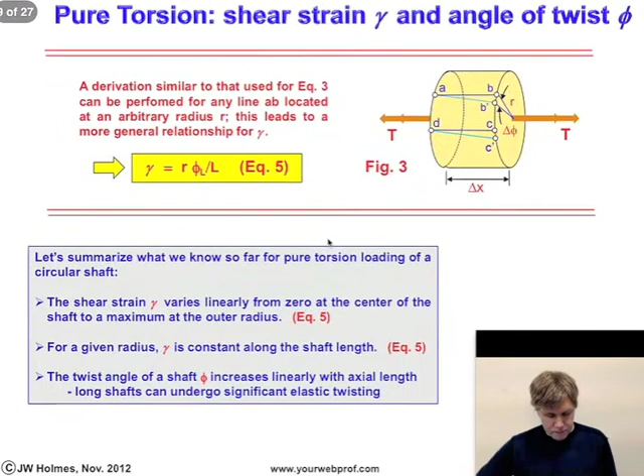All right, so let me skip through what we did in Part A. This was our ending point for Part A, and we're now in the general area of calculation of shear stress. So again, if you look at the rod, all we're doing is essentially taking a shaft, solid or tubular, and applying torques at the ends, and we'd like to know how the shear stress distribution changes as a function of radius of the shaft. Now, from Hooke's law, remembering back to your material science courses or your strength of materials course, the shear stress is related to shear strain by proportionality constant G, which is the shear modulus. So we just apply Hooke's law, and that's equation 6 that I show here.

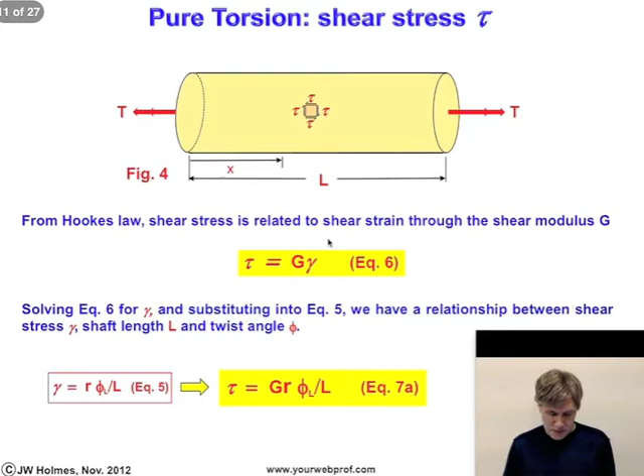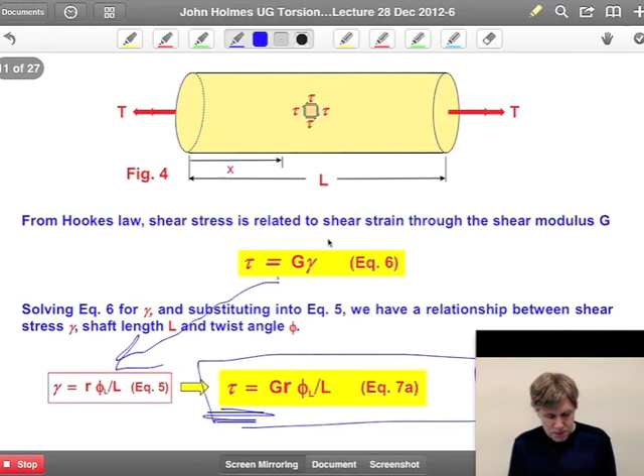If we now take equation 6 and substitute it back into equation 5, so essentially we've got equation 5 from the previous lecture, and we solve now for shear stress after substituting in, we end up with equation 7a, which gives us the shear stress distribution in the shaft as a function of r. So again, that's if I were to cut the shaft in half and look at the face of the shaft. As expected, because shear strain varies from 0 at the center of the shaft to a maximum at the outer surface, the shear stress had better also vary in the same way because they're related simply by this proportionality constant.

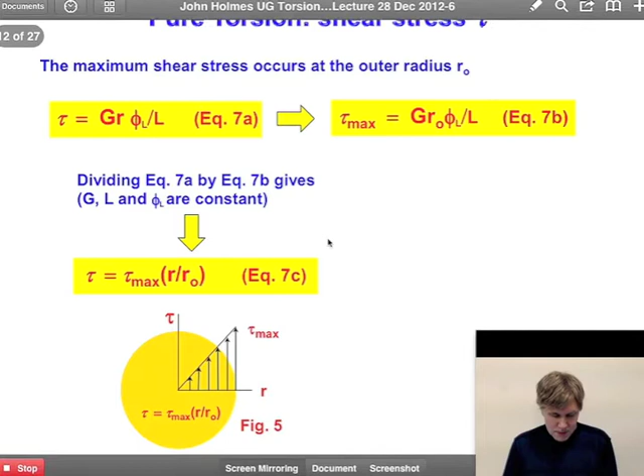Now we'll make use of this expression. Let's first use this to derive a maybe more convenient expression, and then we're actually going to use this expression to determine the shear stress distribution relationship to torque. Tau max naturally occurs at the outer radius. That's equation 7b here. If we now divide equation 7a by 7b, and noting that G, L, and phi L are constants, then we end up with the relationship that we expected between shear stress and radius. I plotted that here in figure 5, where I show essentially a cross section that we've removed from the shaft, and we can better illustrate the linear distribution in shear stress in the shaft.

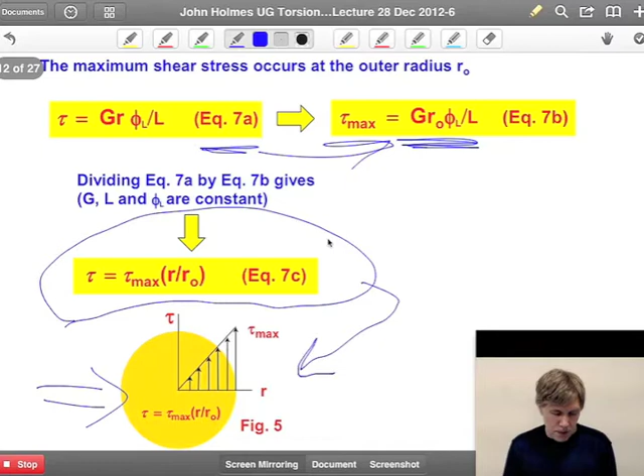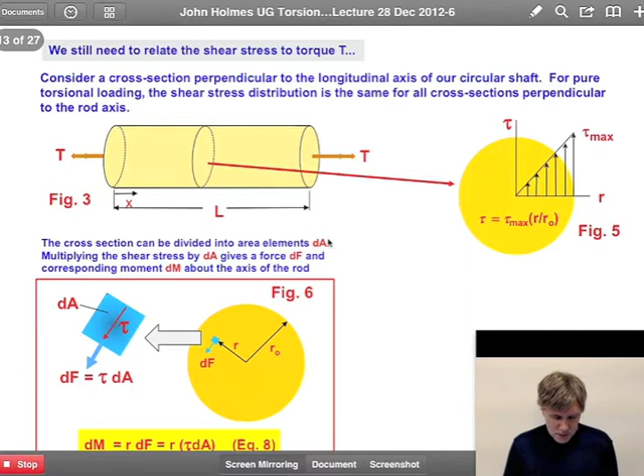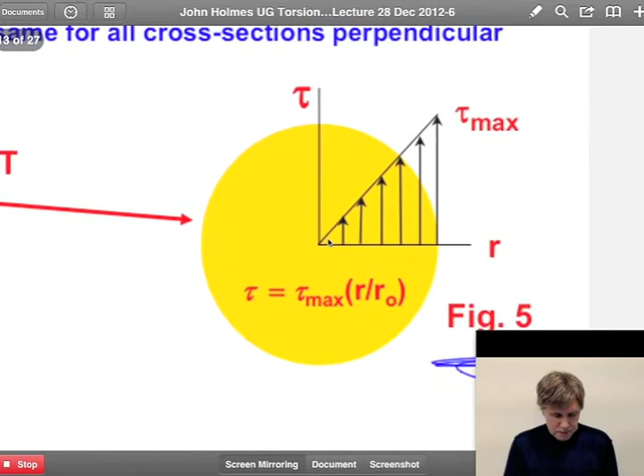Fair enough? Okay, let's go a step further, because we still need to obtain this relationship between shear stress and torque. And I want to slow down a bit here, because this is quite important how we're going to do this. Let me first start with figure 5 here, and it shows again on the cross section the shear stress distribution. Now, just as we have internal stresses in a beam, either bending stresses or shear stresses in a beam under bending loading, we also have these internal shear stresses that develop in the material, or material elements, during torsion.

So suppose that we take a small element of material here, and let's give it an area dA. That acts at a radius, let's call it r, from the center line of the shaft. Now remember that I've got the shear stress distribution here on any material element that I might choose, and so there's shear stress that also acts on this element, tau. If I were to calculate a differential force, that would be dF is tau multiplied by the area. That creates an internal moment, a resisting moment on this element. So we now have this differential moment that's developed, and the moment arm is nothing more than r, times this dF, this differential force.

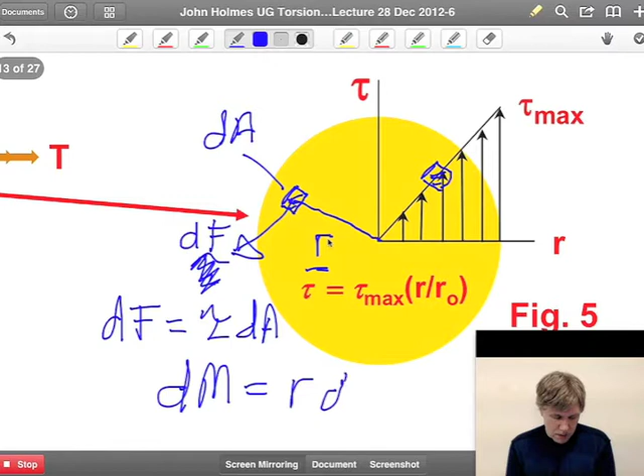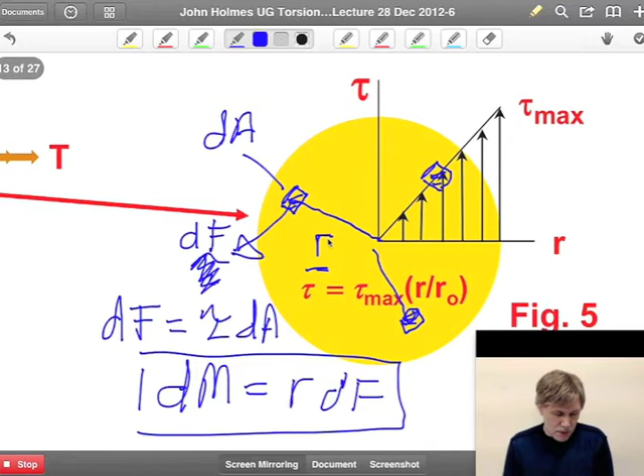Alright, now if you think about it, I've got many of these small elements of material at different radii. That's essentially what's resisting this external applied torque, or the internal moments dm. Okay, so now let's do that once more, because that's a very important point.

And so just to review, the cross section of this shaft can be divided into small area elements dA. If we multiply the shear stress, at a particular radial location, because it varies with radius, by this differential area dA, it gives us an internal force dF. And multiplying dF by the moment arm r gives us this differential moment dM. Let's call that expression 8. So again, this is my moment. Here I've essentially substituted back in for dF, which is tau dA.

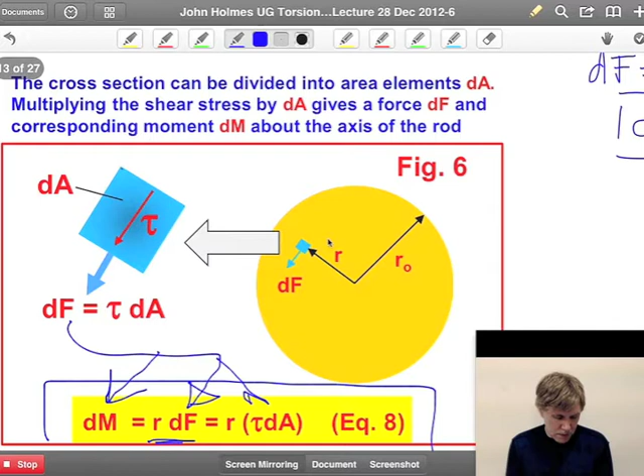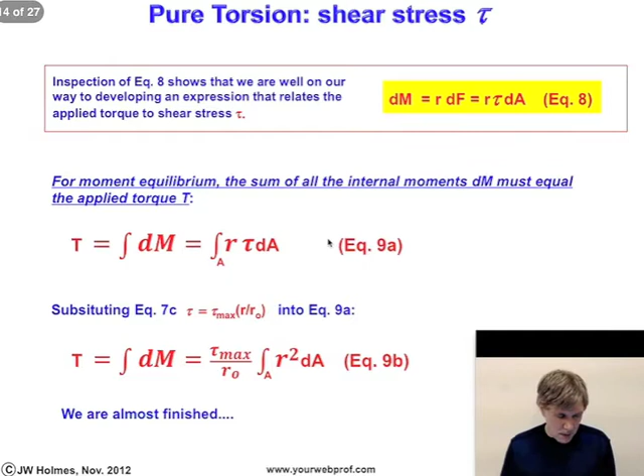Okay, let's continue. Now, if we inspect equation 8, it shows that we're well on our way to obtaining this needed relationship between shear stress and torque. All we have to note now, remember what I said, is that all of these differential moments acting on these material elements are reacting to this external torque T. So all we need to do now is integrate over the cross-sectional area, and I've done that here. Let's call that equation 9a. Again, all I've done is substitute in for dM.

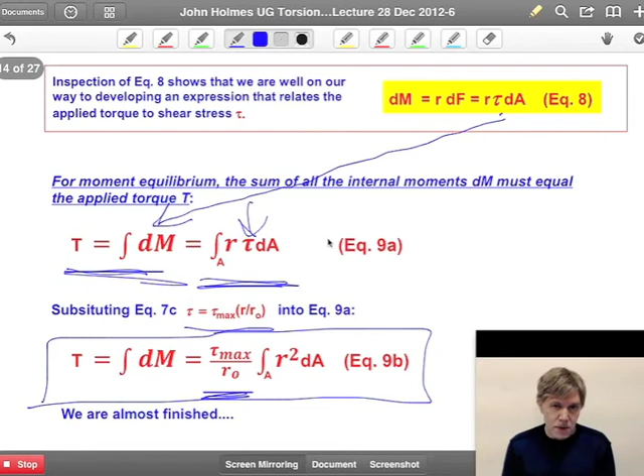Now, we know what the shear stress distribution is along the radius of the shaft. We know that it's a function of radius, so let's stick that in. That was given by equation 7c from lecture A. And if I then factor out tau max and r naught, which are constants, I end up with this expression. So I've now got a relationship between the torque and the shear stress developed in the shaft. Okay, let's continue.

We can simplify equation 9b, which I state here again at the top of the view graph. All we need to note is that this integral, if you remember back to your mathematics courses, is nothing more than the polar area moment of inertia J. So all we have to do is substitute back in here, and this is J. If we do that and we solve for tau max, we end up with the so-called torsion formula for a solid circular shaft, which states that the maximum shear stress developed in the shaft is nothing more than the torque times the outer radius divided by J. We haven't said anything about the material in this particular formula yet. And you can prove J yourself. You've done this in your math courses. dA is just 2 pi r dr, and if you do the integration, you can prove to yourself that's J.

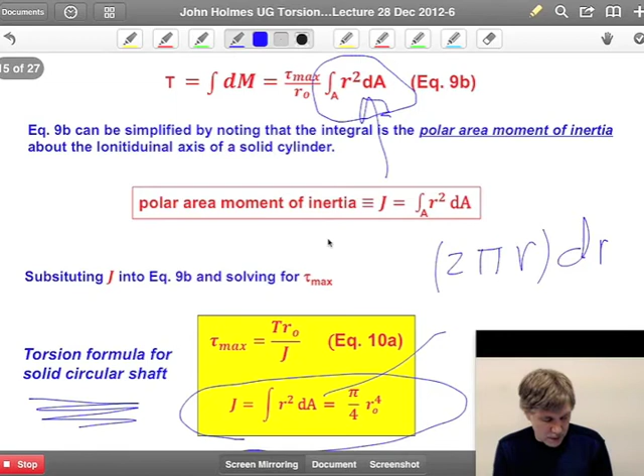So for a solid circular shaft under torsion, we're there, but life's not so easy, because many shafts are tubular or hollow shafts. And there's a reason for that. It has to do with things such as resonant frequency, with the efficient use of material, with low mass. You typically want to have a low mass shaft. Of course, not all shafts are going to be hollow, because it's sometimes difficult to produce a hollow shaft out of a particular material and the size you may need. That's one of the reasons that for simple applications like electric motors, and maybe a shaft in an oil pump, you might just find a standard diameter low carbon steel and utilize that. But for many applications, it's much more efficient.

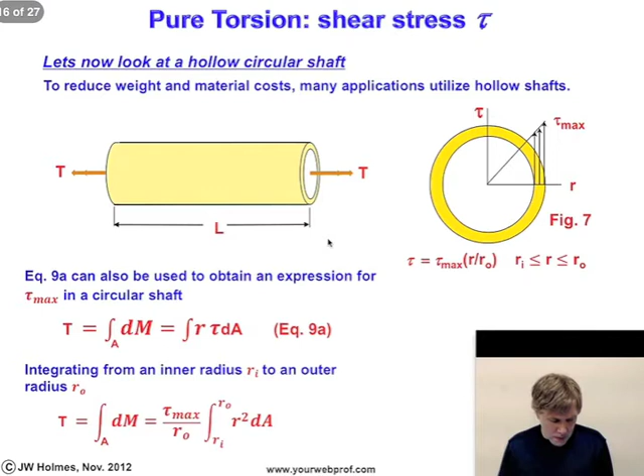The reason that we would rather use a tubular shaft is not only because of the low mass, but from an efficiency point of view. Remember that these differential moments that are resisting this external torque are related to the shear stress and the moment arm. And so the shear stress distribution, which I plot here for a hollow shaft, you can do this on your own, just using the same expression that we had before, but limiting it between R sub i, R inner, and R outer. The shear stress is much higher near the outer edge, near the outer radius, and therefore it's much more efficient to react to this torque. So what goes on in the core of this material, if this was a solid shaft, isn't very important in terms of resisting the torque.

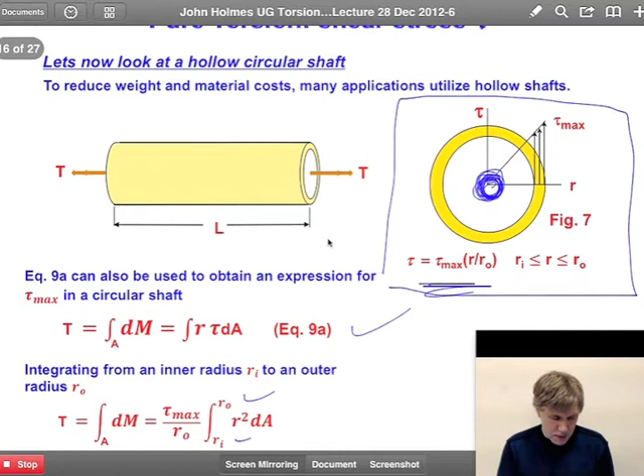Now, the same expression, equation 9a, can be used to obtain an expression for the maximum shear stress in a hollow circular shaft. So we've got the same expression. All we're going to do now is change our limits of integration from R sub i to R naught. Okay? And let's skip to the next view graph. So again, same derivation as before, we just changed the limit of integration from the inner radius to the outer.

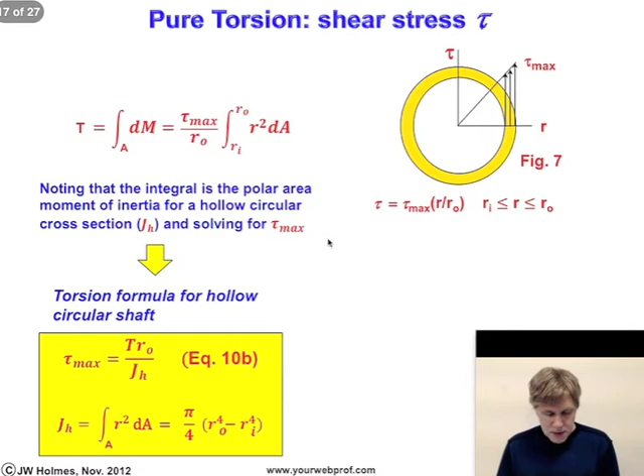All right, I've repeated that expression here again from the previous view graph. Now all we need to do is note that this integral, again back to our mathematics courses, is the polar area moment of inertia for a hollow cross section. Let's give that the symbol JH for hollow. And we now have an expression for the torsion formula for a tube. Let's call that equation 10b. And again, it depends upon the torque, the radius, and the polar area moment of inertia.

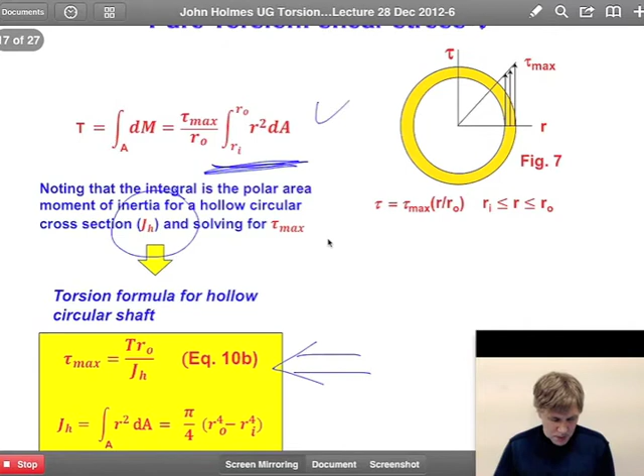If you look at it, you say, all right, what if I've got a 1-inch diameter shaft versus a 2-inch diameter shaft? Well, because it's a cubic power, if we double the diameter from 1 inch to 2 inch, we decrease the maximum shear stress of the shaft by a factor of 8. That's significant because most designs, either for static loading under torsion or for fatigue loading, will depend on the maximum shear stress for lifetime or failure. And so we can easily get a much longer life, if this is a fatigue limited application, by going to larger diameters.

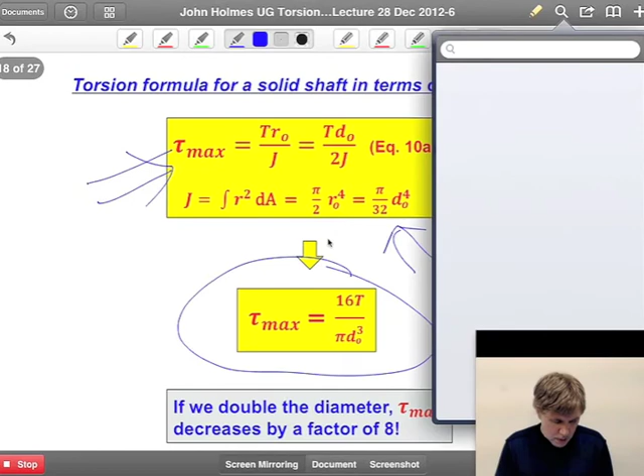And that's the concept of torsional stiffness. Many things have torsional stiffness. An automobile has a torsional stiffness. But in terms of the rods, when we talk about torsional stiffness, we need to put this in a different form. So let's go back to equation 7b, which we derived in lecture A, and equation 10a, which we've just derived, the torsion formula. Let's equate those two equations and solve for the twist angle, the angle of twist of the shaft.

That expression, which I'll call equation 11, is referred to as the torsional stiffness. That's important because for certain applications you would want high torsional stiffness, which means that when you apply the torque, you don't get very much twist. Certainly for a robot arm, you would want high torsional stiffness as well as high bending stiffness. Now, equation 11 can be used to determine the total twist at the end of a shaft subjected to pure torsion. Remember, that's again the limitation we have. This is pure torsion.

Now note, high torsional stiffness implies low twist angle. And how do we obtain that? Primarily through geometry. J is a geometric parameter, the polar moment of inertia. If we increase J or increase G, the shear modulus, the twist angle is less, and we refer to that as a much higher torsional stiffness. So that's two ways, for a given torque and length, to increase torsional stiffness.

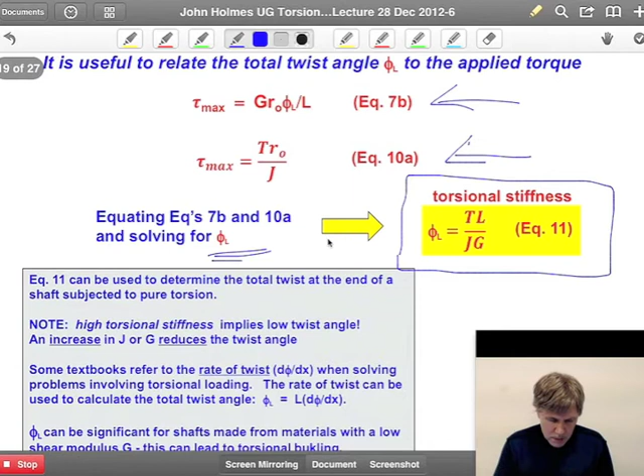Now, just to note, some textbooks, and Timoshenko is one of the very popular textbooks, refer to the rate of twist, which is d phi dx, when solving, for example, homework problems. This rate of twist can be used to calculate the total twist angle at the end of a shaft simply by multiplying by the length. Again, remembering back from lecture A, the d phi dx under pure torsion for a circular shaft is constant. I also want to point out the angle of twist can be significant if you've got a large shaft, and so you have to be careful, in particular if you need a precise application, or you want to limit the amount of rotational deformation.

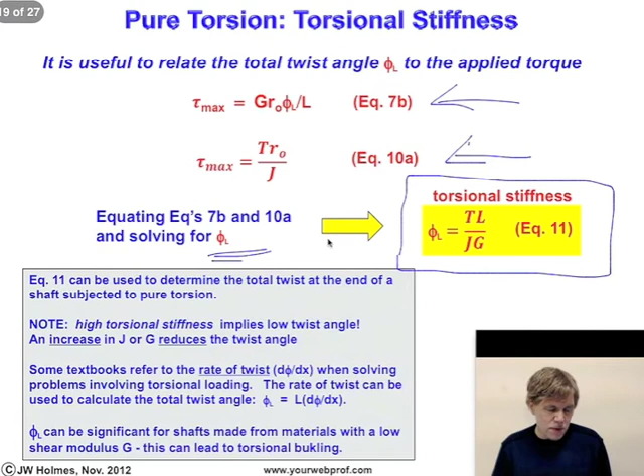Not only can you get a lot of twisting, but that can lead to another problem, which is whipping of the shaft, or whirling problems. You have to keep that under consideration, and that's beyond the scope of this lecture. That's covered typically in a mechanical design course, and there'll be web lectures covering mechanical design, but that'll probably be 6 months from now.

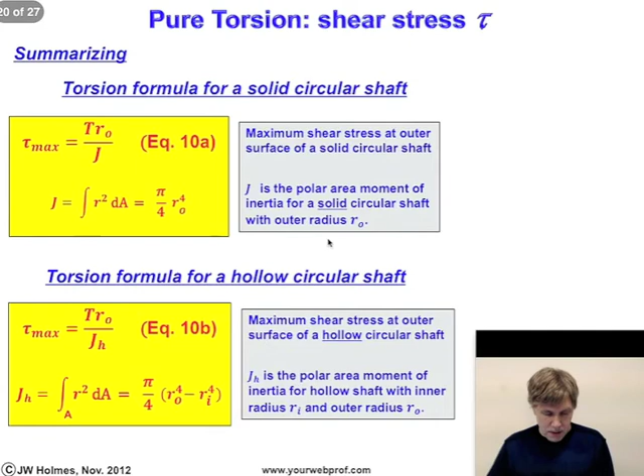All right, so summarizing. I'll just leave these for you guys to read. We've got the torsion formula for a solid circular shaft as well as for a hollow circular shaft. Now some general comments to wrap up this part B. You really need to go back to the derivation and the assumptions that we made and understand the implications of that when you go to design a shaft.

You also need, if you were to take a course from me, and I suppose that I'm old enough now, I started teaching in '88, that some of you could actually be the sons or daughters of people I taught many years ago at Michigan. But your parents will tell you, if they had me for a class, that I would dock significantly points on an exam or homework problem if you didn't state the assumptions. And so I expect that your current professors expect you to do that. So clearly state all assumptions when solving a problem.

The equations we derive only apply for loading below the yield strength. Again, that was one of our assumptions. Now, for thin-walled tubes, we also need to worry about things such as buckling. That could occur if we have an overload, if we apply too much load, or if we have variations in the geometry or some defects. And I'll cover buckling in another teaching module, which is in mechanics of materials.

These equations in general should not be applied to composite materials with continuous fibers, and that's more in the area of laminate theory, but essentially it's because we have anisotropic material and you may get delamination between the various plies. But it's a very interesting mechanical design problem, so I'd encourage you, if you get a chance, to take a laminate theory course or a composite course. These equations should also not be applied, and this again was one of the basic assumptions we made, if we have time-dependent behavior such as creep or viscoelastic effects in the material.

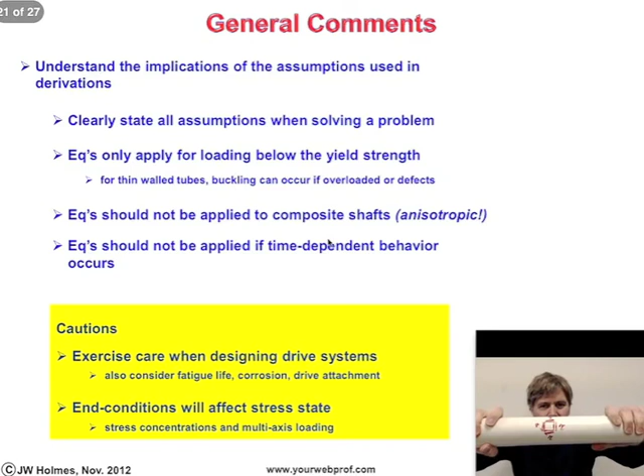We also have to worry about multi-axis loading. If I take this tube again, and I apply torsion, and I apply bending at the same time, or I apply compression or tension, that's going to change the stress state. It's going to change the fatigue life. We can handle those problems. If it's a fatigue problem, we can handle that through multi-axis fatigue theory. So it's not a big issue, and it's done every day. Otherwise, you wouldn't be able to drive a car with a drive shaft for very long. All right, so these problems have been solved, but for each application and each time you choose a material, you have to go back through and reanalyze the problem.

All right, fair enough. Part C of the torsion lecture will be posted probably in about a week or so. So review part A, part B. Email me if you have any questions, and look for part C, which are example problems. I'll solve maybe 2 or 3 example problems that are typical for undergraduate engineering, and run through the solutions and try to point out some of the more important aspects, for example, in choosing the proper drive shaft material or diameter. All right, good enough. Take care.